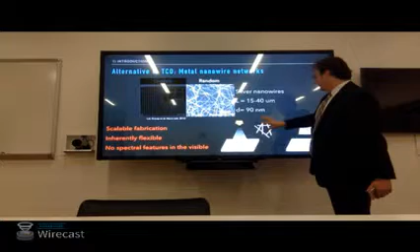So for those reasons, we focus on random nanowire networks, and in contrast to the vapor deposition, we start with nanowires in solution phase, and we can use a whole host of solution phase processing to go from an ink to a layer. Now again, we need an interconnected layer because the silver is doing the conduction here, so we need a percolating layer, it's called, where we have connections in the nanowires allowing long-range conductivity. At this point, you might be wondering, well, I said metal nanowire networks, why do they have to be silver?

I could naively say that silver is the most conductive metal at room temperature, but if you look at the four most conductive metals, there are some nice alternatives, especially when you look at cost. Silver is $250 a pound, aluminum 68 cents a pound. What we're really tracking is abundance in the Earth's crust. There's orders of magnitude more aluminum than silver.

Silver comes back into favor when we consider a couple physical aspects. First, silver and gold are noble metals, more resistant to oxidation than copper and aluminum. Silver will last maybe not as long as gold, but much longer than copper and aluminum. Additionally, copper and gold have a yellowish hue, a visible absorptive resonance in the bulk metal, whereas silver and aluminum are colorless.

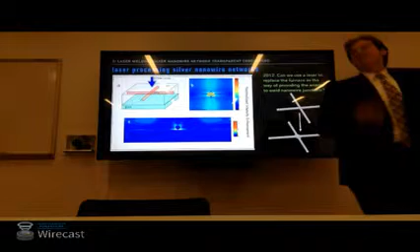Do any of these structures act like antennas? What we see is precisely at the junction between nanowires, we get an intensity enhancement. This wasn't totally a pleasant surprise. We suspected this is what would happen because that junction between nanowires is a highly scattering area. When you have that high scattering, you tend to be able to trade energy into the material, trade a photon for a plasma oscillation in your metal, or plasmon. So we see about a 10-fold increase in intensity.

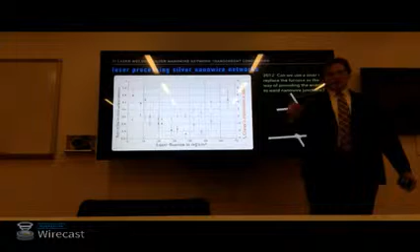So this is the direct measurement, but perhaps we're more interested in the indirect measurement, which would be measuring the sheet resistance before and after this process. So if we make a lot of nanowire networks - and in my 6 years, I don't even want to think about how many nanowire networks I've made - we go and measure sheet resistance before, put it under the laser, and measure that same device, that same sample again. We can report a ratio of final to initial surface resistance as a function of laser fluence.

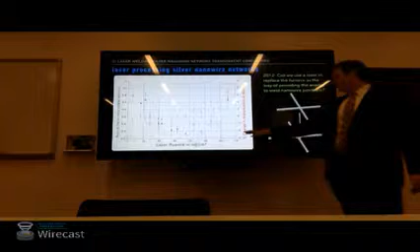That's the energy density again. Now the black dots are that data set, the resistance data set. What we see is we can have up to an 80% enhancement, so have a final resistance that's 20% of the initial resistance, in kind of an optimal processing range of maybe 20 to 50 millijoule per centimeter square, which is actually a relatively low dosage of laser radiation.

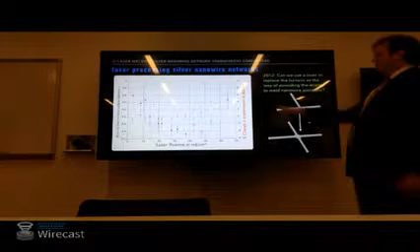For good measure, we can also track the optical transmission of these devices. We don't expect to see a change from the laser processing, and what we see is exactly that. Our zero line for the red data here shows no change to optical transmission within the error bars until we get to very high laser fluences. What we're doing there is removing material with the laser - we're ablating with the laser, and we don't want to do that either. So really this describes, say, 20 to 40 millijoule per centimeter square as the optimal processing.

To get a sense of absolute values for this study, we used very dense nanowire networks, things that are only transmitting about 55 to 70% of light. So it's a very dense coating. However, that leads to high initial surface resistances in the 10 to 30 range, dropping down to 5 to 10 after laser processing. So the squares here are after the processing.

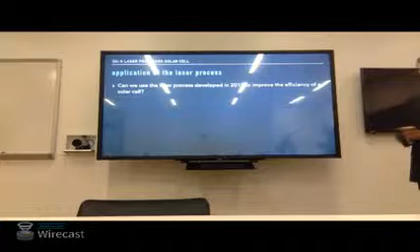So that's the laser process, and we're going to move on now to ask, can we use this laser process in a real device? We'll aim to answer two questions. First, can we improve the performance or efficiency of a real solar cell with this process? And second, because we have a resonant, gentle process, can we perform it on top of a completed device without damaging it? This is the device we'll be using.

It's probably very familiar to Professor Sturm. I worked closely with his lab to do this part of my thesis research. Results published in ACS, Applied Materials and Interfaces. It's a hybrid organic-inorganic heterojunction solar cell.

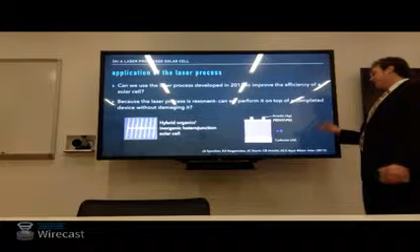Here's our side view of the material system. The heterojunction is N-type silicon with PEDOT:PSS, acting as an electron blocking layer, hole injection layer. When we don't use nanowires, what we would use is a vapor deposited bus bar and finger electrode as our top, an aluminum cathode.

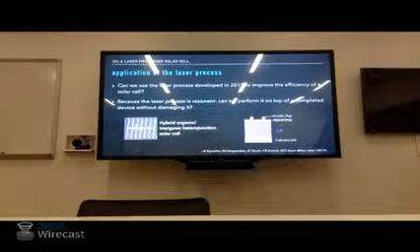And because the top layer next to the transparent electrode is an organic semiconductor, it's sensitive to high temperatures. That's why ITO can't be employed in this scheme. ITO typically requires a high temperature anneal. So we couldn't put this thing in a vacuum chamber and sputter ITO onto it.

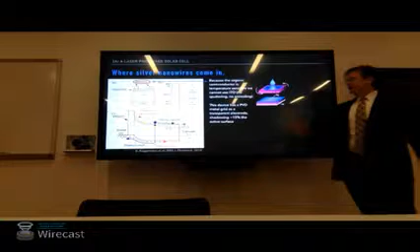So right now they use a bus bar and finger grid. This is kind of the processing scheme. The PEDOT is spun onto the wafer, and then physical vapor deposition for the metal contacts.

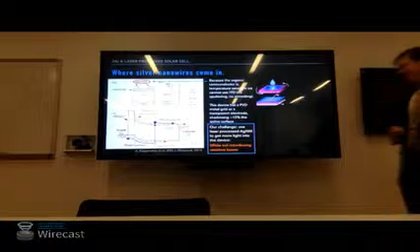A typical bus bar on these will shadow about 15% of your device. That means 15% of your area is thrown away. We're not using that to collect sunlight. Our challenge is to use silver nanowires to get more light into the device, pulling more current out of the device. Our challenge is not introducing resistive losses, resistive losses in plane or across the plane.

We propose this sort of processing scheme where we start again with spin coating the PEDOT:PSS, our organic semiconductor. Then we'll spray coat the silver nanowires. We're going to still have a physical vapor deposition step, mostly for the back electrode, but also have a contact point for testing, so we'll put a contact bar on. Then we'll use our laser. And this is a picture of what a device looks like after it's been made.

Before we make devices, there's some salient pre-testing that needs to be done. The laser processing I discussed just a moment ago deals with nanowires on glass. Now we have nanowires on PEDOT:PSS, a slightly different system.

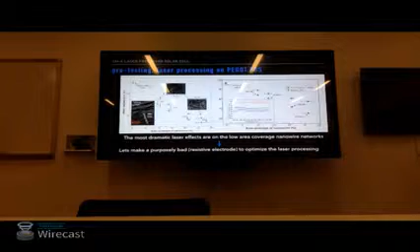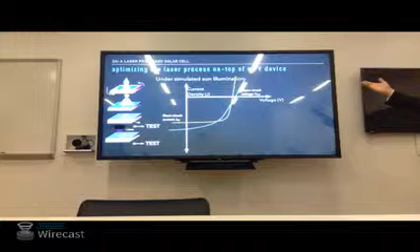We'll be reporting things like short circuit current. So we would say maybe the blue has a better short circuit current, it's pulling out more current. Open circuit voltage, where the yellow has a lower open circuit voltage, but then power conversion efficiency, which is kind of our maximum power we can get out. Again, power is kind of our x times f of x here, if you will. So it's our current times our voltage, we get a power density.

And our fill factor is a geometric factor that relates the open circuit voltage and the short circuit current to the power conversion efficiency. The power conversion efficiency is going to tell us, did we improve the device? The short circuit current, for the most part, is going to tell us, is the electrode more transparent? Are we getting more light?

Light causing current. The open circuit voltage will tell us something about whether we messed up these internal electronics. And the fill factor is going to tell us something about whether we added resistance. And again, this is what we're afraid of, is adding resistance.

So if we look at this purposely bad device that we expect to see large changes, in fact we do. If we track those metrics which I just discussed, we see a clear region where we have great enhancement to our short circuit current and our power conversion efficiency. So we can use this information to prescribe an optimal processing of, say, 15 to 25 millijoules per centimeter squared.

And now we've answered one of the questions that we sought out to answer: can we do our laser process on an otherwise completed solar cell? And yes, right here we have, and we've actually made this already bad device perform much, much better. We're reaching almost 50% enhancement to efficiency. So let's see what happens when we apply it to a more optimized device.

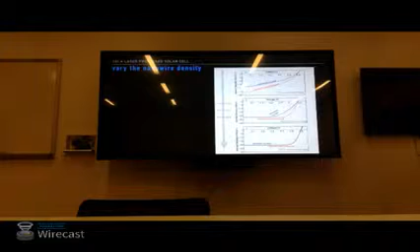Really, the point of the publication, the champion here, is that we can take a device that's pretty good and make it act like an excellent device. Using less nanowires, we can make it act as if it had more nanowires there. You'll also see we get a little more short circuit current, because we're more transparent there. So there's tables of values reported in the thesis. These are values for all of those metrics that we discussed.

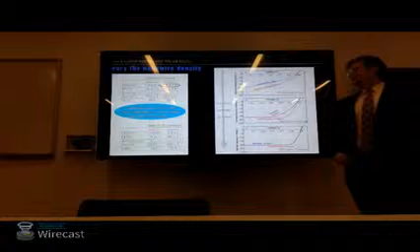Really, the take-home point here is that in the medium coverage batch, we took something with a mean of 7.3% power conversion efficiency and brought it to 9.2. In our best device, we got something like a 26% power conversion efficiency increase in our optimized system. Of course, in the low system, we can report numbers like 50% enhancements, but in a relevant system, a very nice increase. And we can use less nanowires, a nice point to take home as well, and make a device that acts like it has way more.

So summarizing this section, we've answered these 2 questions. We said, can we use the laser process to improve efficiency in a solar cell? Yes. We do right here. We see the same exact device before and after laser processing. Can we do it on an otherwise completed device without damaging it? Yes. You saw that with the low device. You see that here. You see it in all the devices.

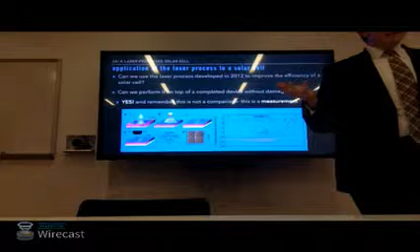Another point to harp on here is that this is not a brand X comparison. I'm not saying that we took a batch of devices that had a laser process and a batch of devices that didn't, and compared them at the end. This is a measurement. We took the device, measured it, then we put it under the laser, and we measured it again.

So let's change lanes a little bit and talk about some of the unique difficulties we're going to encounter moving from the photovoltaic study to the OLED study. So the PV project, as we just discussed, was fruitful. It proved some of the things we were setting out to prove, that we can use this laser process in a fab.

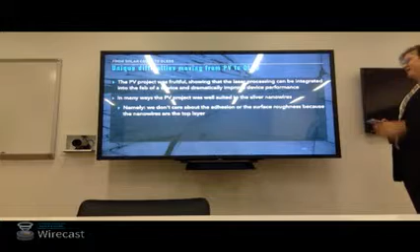But in many ways, it was well suited to using nanowires. If you remember way back to the slide on drawbacks of silver nanowires, we really only had to overcome one here, which was the narrow contact between nanowires. We didn't care about surface roughness. We didn't care about adhesion, and because we had that PVD contact point, we didn't care really about contacting downstream electronics. We kind of heavy-handedly just added a contact.

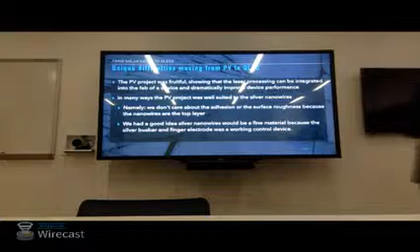So we had a good idea going in also that silver would be a fine material because silver was what was used as the bus bar and finger. So energetics, things like changing our Schottky barrier between the metal and the active layers, weren't really thought about. Didn't have to think about it.

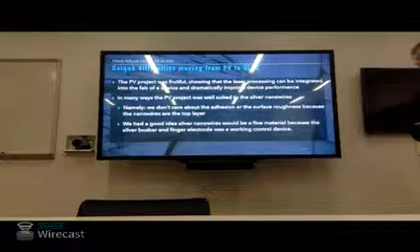Here we have a different beast. This is our organic light emitting diode. And if we see, we have many complex, long-named organic molecules in a highly engineered stack. We have some inorganics thrown in there just for fun. The layers between the anode and cathode here are drawn to scale. But the take-home here is we have many vapor-deposited layers. And our transparent electrode, our anode, is the substrate for all of these vapor-deposited layers, culminating in a PVD aluminum cathode, aluminum with the lithium fluoride injection layer.

In this device, currently, ITO is used as our anode, as our substrate for the deposition of all of these layers. So therefore, in contrast to the PV experiment where we were trying to be better than a bus bar and finger, here really we're taking a swing at the champ. Here we're going after ITO in the name of can we make a flexible device. In the solar cell we wanted to improve performance. Here, if the performance is the same but we have a flexible device, we'll be happy. I'll give it a little bit away. We're going to have a better device at the end.

But the work here is a topic of a paper from this year, Advanced Functional Materials. We were lucky enough to get a journal cover. And Professor Barry Rand's lab was instrumental in getting this work done. It wouldn't have happened without his lab and his students.

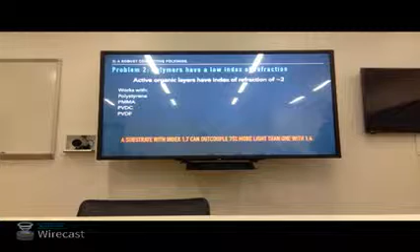This solution, of course, leads to problem 2. Problem 2 is that polymers have a low index of refraction, and the active organic layers in our device have a high index of refraction. This is the list I gave you on the last slide, works with these materials. Well, if we look at the index of refraction for these materials, say we're around 1.5.

What I'm getting at here is that when you create your light in a random dipole in the organic media, you've really restricted the wave vectors which will outcouple. You have this large region, whereas if you emit light with these certain vectors, it will be in a natural waveguide between the organic layers and the inorganic, and the polymer layers, also organic.

Take-home point is that a refractive index of 1.7 can outcouple 75% more light than one with 1.4, and we're holding way too many things constant, so Barry might laugh at that statement, but it is true if we hold all these things constant.

So our solution for problem 2 comes in the form of polyimides. Our famous polyimide, Kapton, our representative from DuPont here is going to be upset I don't have a circle R next to Kapton. It's a registered trademark of DuPont. Has an index of refraction in the visible of 1.7, what we're hoping for. And that's about as good as you can get with plastics.

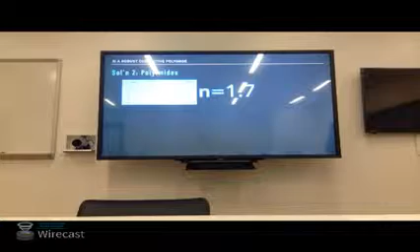And also for free with polyimides, we get great things like chemical stability, thermal stability, and mechanical stability. Sorry, mechanically robust as well. So, this is really a great system to be used as a substrate in flexible electronics. And many people use this as a substrate for flexible circuits.

However, solution 2, of course, leads to problem 3. Problem 3, the polyimides aren't transparent. If you remember that picture that was just on the screen, it has that characteristic amber hue. That's how you know you're using Kapton, or polyimide. So, the solution to problem 3 is to make our own colorless polyimide.

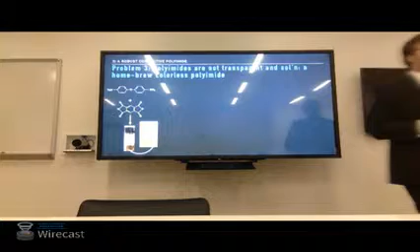So if I give away some trade secrets here, this is how you make Kapton. All polyimides really are a condensation of a dianiline moiety and a dianhydride moiety, the dianiline being the top one here. These things polymerize in a downhill reaction, and then you add heat, you make a polyimide. Again, not very transparent as it looks. It has been suggested in the literature that fluorinated and semi-alicyclic moieties would lead to greater transparency in the visible.

So, you need a 100 nanometer layer. What was that? You need a 100 nanometer layer. Well, maybe I should clarify. The goal really here is to make a substrate and an electrode. So anytime we add more layers, we have to think about the index of refraction, right? So we have to be worried about that total transparency. So really what we'd like to do is just use one material for our substrate and our electrode.

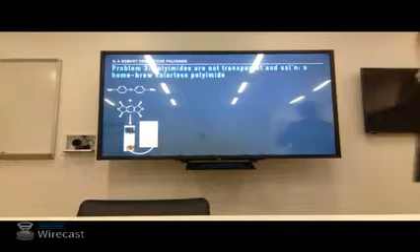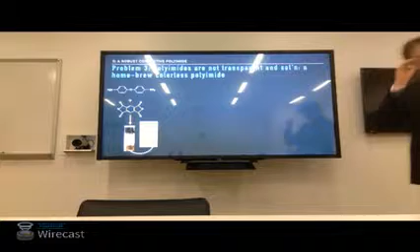So what we end up having is something more in the tens of micron layer, where this becomes unacceptable in transmission. True, if I just wanted to encapsulate the wires and just wanted that one layer, yeah, you could definitely get away with Kapton, because the absorption is going to be negligible in 100 nanometers. However, then the next layer next to the Kapton has to step down or index match and things like that. We just have a nesting doll problem. So we're going to say, let's have our electrode be impregnated right into our substrate.

But very good point. So as I was saying, fluorinated and semi-alicyclic moieties have been suggested to increase our optical transmission. So we settle on this after quite a bit of searching through many moieties. Jake and Carl here were very, very helpful, letting me use their air-free setup to make these things. But this one has a fluorinated dianiline. We see how it looks in solution, and because it's very thin, you can't even tell it's there, but there is a sheet of our transparent polyimide, our colorless polyimide.

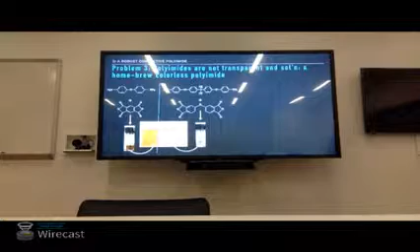This is the proposed chemical structure. We see our imide group, and we can kind of recognize where the dianiline and dianhydride moiety went to. More salient, of course, are the indirect measurements. What we're interested in is index of refraction. We see we're well above 1.6 through the visible. And if we look at the normalized transmission of this versus Kapton, we've moved this elbow of transmission to include more blue wavelengths, giving us the measurement you see with your eyes there.

What's the glass transition temperature? Interestingly, we haven't measured it, but what I've found through the literature for things like this and polyimides in general, they degrade before a glass transition. So, you could think of it as 400C. I mean, they have the excellent thermal stability of being a polyimide, and that goes into it. So, glass transition's kind of a hairy point when you talk about polyimides.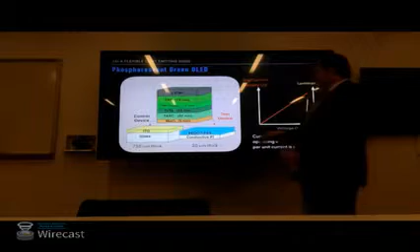So let's move on to our real device. Here are compact representations of those long, ugly organic names I had in the slide where we introduced it. And now we're going to, as I said, challenge the champion transparent conductor, ITO. Our control device is ITO on glass. That device is going to be about 750 microns thick. That's the glass, mostly. If we replace that now with our transparent polyimide, which we can use as both the electrode and the substrate, we have about 20 microns thick.

That's limited by difficulty of processing, as Kyung and before her Taewook know. If we get thinner, it becomes very hard to handle and test these things, but we can certainly do it easily.

And what we'll be looking at this time are similarly JV characteristics. Now we have a log plot, and this is a cartoon model. It's not going to look like this, right? We have many, many different voltage drops and turn-ons and interfaces in here, but if it was just a simple diode, that's what we'd see. And then luminance, which is measuring the light out with a calibrated silicon photodiode.

So this is what we see when we compare our control device with the ITO to our test structure. What we see from the JV characteristics is that the silver nanowires are more resistive. At a given voltage, you get less current through. However, the luminance, which is not a log plot, it's linear, is not that much depressed. So while it's more resistive, this doesn't really show us whether we made a better or worse device.

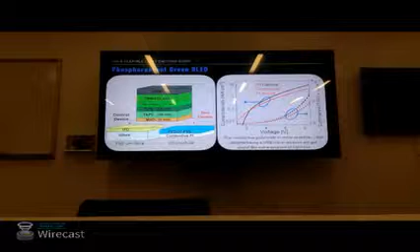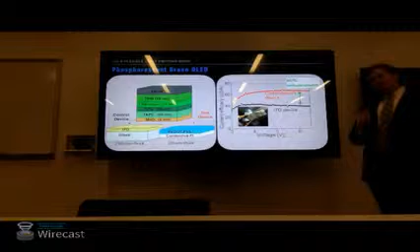And what we see is while the nanowires are more resistive, per unit current, you get way more light out of the nanowire device. In fact, 60% more at 6 volts. With the benefit of being flexible, so inset here is the device being bent in half, which you definitely could not do on the ITO devices.

So let's just take a minute to understand why we get a better device from a more resistive electrode. We have a work function difference now because we're not comparing silver to silver like in the solar cell, but we have ITO to silver. We have more of a barrier to hole injection here. So that's going to lead to that resistance.

However, if we think about charge balance, which is restricting the charge flow to get more of an ideal rate to suppress loss mechanisms that could be there with a higher amount of positive charge carriers in our device, we could actually posit that perhaps the charge balance is better when using this energetic structure rather than ITO. The addition of the PEDOT layer is going to add some series resistance as well.

Another area of enhancement is that this problem we discussed, the outcoupling, and not into a wave-guided mode, certainly holds for our planar interfaces when we use ITO. When we have nanowires here, the reason you can see where the nanowires are is because they're hazy, they're scattering, they're a physical structure there.

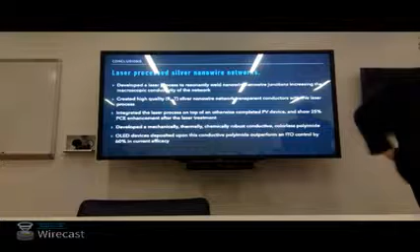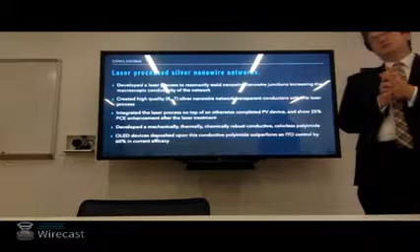So, Josh, do you have an idea why the titanium dioxide is protecting the wire? Yeah, I mean it makes a shell, like a hard shell. That's the best theory - that we have a hard shell, titania, which is kind of maybe acting like a straw around water. If you think of it more technically, maybe it's about altering the local chemical potential, but physically you could probably think of it as a hard shell. I don't think that's a bad analogy.

Have you done any cross-sectional TEM? We have not. There are papers in the literature that we follow closely to make these hard shells, and when we replicate their process, they measured a 2 nanometer shell. So that's what we kind of expect that we have. We have not.

Questions from the audience? If not, John? Do you have a sense for what dominates the resistance here? Is it conduction through the nanowires or an interfacial resistance between nanowires and whatever? Yeah, no, it's certainly both, but it depends on where we're looking, right?

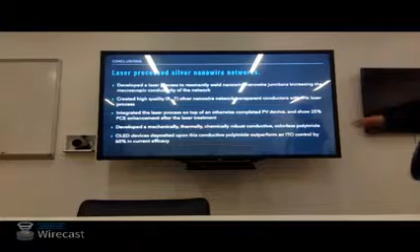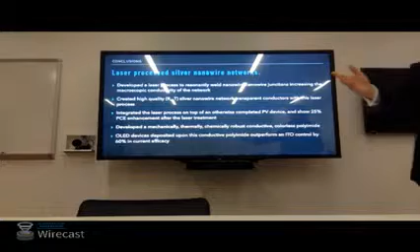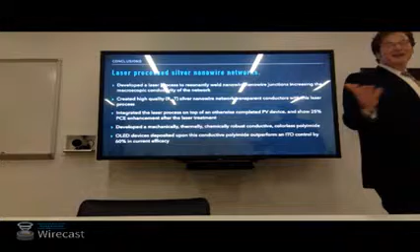If we're trying to quantify just the electrode, we quantify the resistance in the plane, where we have ohmic contact between our nanowires, and we want to take a charge from over there in the device and move it to the downstream electronics. Certainly, if we're trying to use this layer in a system where it's not appropriate, you can build in potential drops or resistances across the plane. Whenever you have a metal contacting a semiconductor or otherwise, you'll have these fields. So it really depends on the electrode we make. I can make you an electrode that's limited by junctions, or I can make you an electrode that's limited by transport through the nanowires. In the thesis, if you want to see, we dive into it a little bit in terms of simulation, and it shows what I just said there - you have a range of useful electrodes where the dominant resistance mechanism can be either.

So there's a lot of companies out there that sell you a silver nanowire ink, like Cambrios and things like that. What do they do? So, go out of business? No. Yeah, I'm sad to announce that Cambrios filed for Chapter 7 bankruptcy just a week ago. And in my thesis, I do praise them as a company that... Right, but what's different? So yeah, Cambrios' focus is...

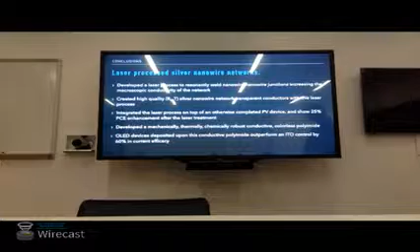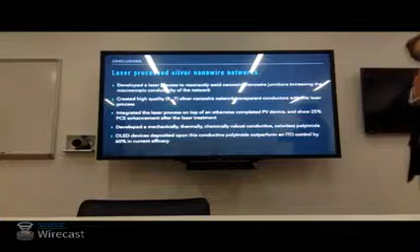What do they get in terms of ohms per square? They have a different chemical trick. Yeah, exactly, precisely. So Cambrios specs 10 ohms per square at about 95% transparency - excellent, beats ITO hands down. Their magic is in their ink. Of course, it's all patented, but this is from talking to a Cambrios representative at a conference: it's dispersive additives and adhesive additives. Dispersive additives give you shelf life on your ink, adhesive additives make it easy to deposit. I guess there's a third thing I should mention also - it's the nanowire geometry. Really, right now, you want the longest, thinnest nanowires. We're not really near a range where the size of the nanowire is going to add to resistance. At some scale, when we shrink the nanowire down, quantum effects will come in and transport effects will come in, increasing resistance, but we're not that close to that. So they use very long, thin nanowires. What that also does is lowers your haze, so you have a very nice looking electrode - you see really the total transmission through.

But in terms of the junctions - yeah, so they have a laser process. That's a key issue. That's their adhesive additives, they say, that makes it so it doesn't need to be post-processed. They recommend a furnace anneal, but not at relevant temperatures. This is the public specs I've seen.

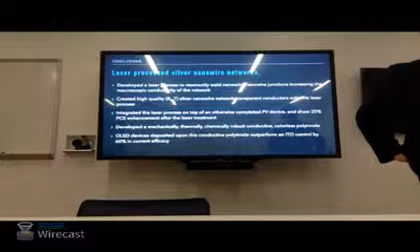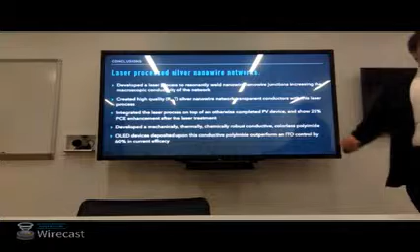I see 10 ohms per square, but I never see the optical transparency associated with that 10 ohms per square. I see that with like the 100 ohms per square, so I really don't know. Yeah, their public specs were 10 ohms per square at about 95% transparency at the same time. We haven't made those here either, and I'll blame it on my nanowire geometry more than anything else, because the adhesive and dispersive additives help with shelf life and deposition, but those are things you get right through trial and error and labor. Certainly the numbers they report are different from the numbers I hit. Or maybe that's the reason they went under, I should say, I won't speculate. But yeah, unfortunately, Cambrios is no more.

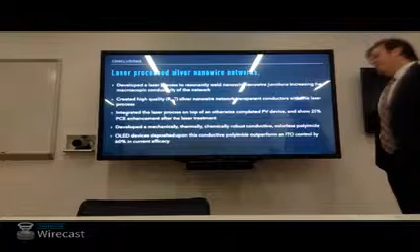One other question, regarding the light extraction in the OLEDs - can you comment on, essentially, you took a glass substrate and replaced it with a plastic substrate. Does that affect that 60% plus or minus? No, that's helping us for sure. We have a thinner interface there, and because we have a higher index in the glass, there's another waveguide between the outside world and the glass.

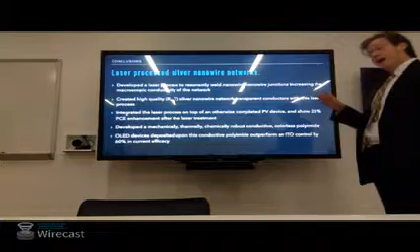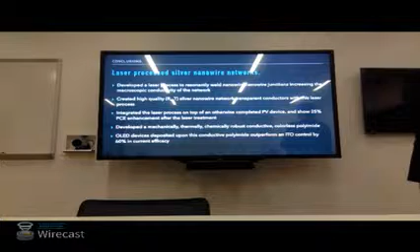So those numbers, were they on glass substrates? Those are ITO, actually, I'm misspeaking, let me back up. The ITO is on glass. And the glass has a lower index of refraction than the polyimide. The polyimide is freestanding, flexible when we measure it, so there's no glass there. Your data was all on the plastic substrate with the high index. That's correct, no glass when we measure, which is part of the reason why it needs to be thick. We're kind of limited on our thickness - we'd like to be a little thinner for transparency, but we're limited on the thickness for what's feasible to handle and test. So 20 microns is what a very skilled postdoc or graduate student can handle.

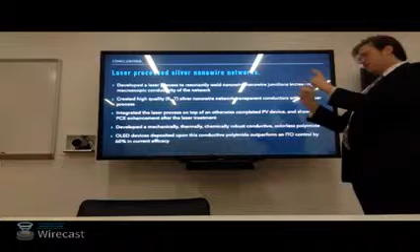I was just going to ask, in terms of potential scale up of something like this, how quickly can you do the laser sintering process? Ooh, that's a great question. Our laser process is limited right now by our linear motion and the rep rate of our laser. There are certainly lasers that can do 100 kilohertz, megahertz, and if you can run that in a stable configuration, rastering along the substrate, you could use our method. Probably what you'd want to do is use a much bigger beam than we use. I didn't harp on this point, but we use a macroscopic laser beam, and because the energy gets channeled to those junctions, we can use a big beam and raster it along the sample. We're not focusing the laser on the junction - some people take that away from the talk, but that's not what we're doing. It's a macroscopic beam causing microscopic changes. So maybe what we could do is have a laser that outputs more energy per pulse, make that beam spot bigger, and increase the speed.

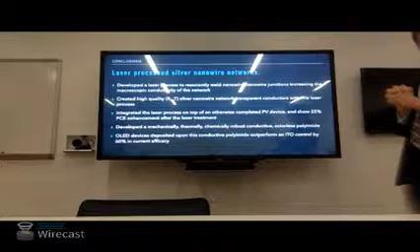Lasers always scare people for a number of reasons in processing, right? Because they sound expensive, it sounds like you need a specialist to operate them, and in some sense, yeah, we can keep that myth going that you need a laser specialist for laser processing or manufacturing. But I can see that there are certainly issues that on a lab scale we have the luxury of not thinking about.

Well, do you have some questions? Yeah, sure. You teased me a bit at the beginning of your presentation by talking about interfacial mechanics. I said that was one of our notes, but go ahead - what insights did you get in terms of the role of interfacial mechanics in some of the systems? I would say the first insight that comes to mind is it's easier and nicer when we can ignore it. So let me explain what I mean.

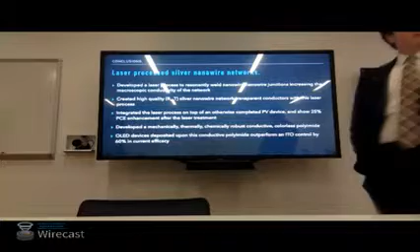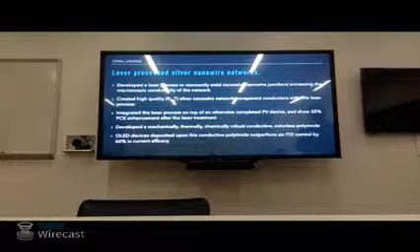So in the solar cell work, because it's our last layer to the outside world, the silver nanowires, I don't have to worry about any sort of mechanical role of that interface. With the OLED work it's a totally different beast. As I mentioned, we need to use polymer encapsulant for the surface roughness. That polymer, with the nanowires in it, has to be robust enough to stand up to deposition and then do our mechanical testing. So we kind of get for free all the beautiful things that come with a polyimide. However, we've tried things like polystyrene, which has a reasonable index of refraction, but it's just too brittle, or it doesn't play nicely to encapsulate all the roughness of the nanowires. So the interfacial mechanics really comes in when we need to peel it off from our glass - we need to know which side the nanowires are going to stay on.

PDMS is great for a number of reasons for flexible electronics. It's optically clear, and there are some methods in the literature to increase the index of refraction, so it might have been a promising candidate. PDMS comes off glass nicely, but it won't hold the nanowires. That's some of where we have to think about interfacial mechanics.

You talked about nanowire cylindrical geometries and adhesion, and I was intrigued by your thinking. Part of this is geometry and adhesion, and part of it is more intrinsic. Could you give us some insights into what the issues were that led you to that?

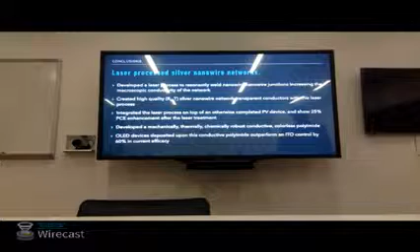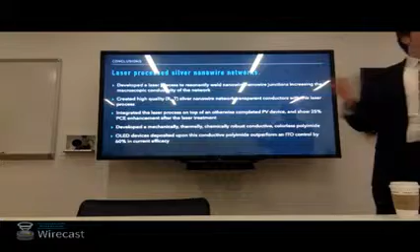What I meant when talking about it is that, in contrast to a planar contact—say a deposited silver film—the contact at a wire on top of a substrate is a line. So we could think of our surface energies as being altered, and that really is what I blame for the adhesion issues of why the nanowires don't adhere to anything. It doesn't really matter what substrate you start with in terms of surface energy, high or low—hydrogen-terminated silicon or oxide-terminated silicon—it doesn't stick nicely on anything.

And that's why these commercial companies have to add adhesives, probably organic molecules, to the inks. Again, I do think there are fruitful lines of research in, say, simulating these things—simulating your chemical environment around a line contact versus a plane. It's not something we look at.

But you've got a dirty surface, in a sense, when you're doing all of this. That's correct, yeah—you really don't know what you're sticking to, from my viewpoint. That would make it a very difficult simulation, yes. Because the real-world analog, as you just pointed out, it's not just our nanowires—there's nanoparticles in there, and there's probably solvent residue, and crud, which is ubiquitous.

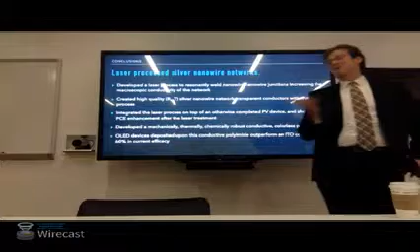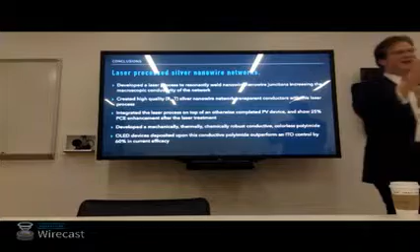Ubiquitous crud as well. So one of the main harping points I put up in the beginning is that we make these electrodes in the lab atmosphere, we laser process them in the lab atmosphere, which sounds wonderful until you introduce ubiquitous crud. That makes me jealous of people who do vapor phase deposition because they get the high purity. But the vapor phase deposition people would look at me and say, do you know how often I have to refine my ingredients? And if something goes wrong, I have no idea what the contaminant was. So there might be a happy medium there, but I get the benefits of working in the laboratory atmosphere that certainly come with detriments like crud.

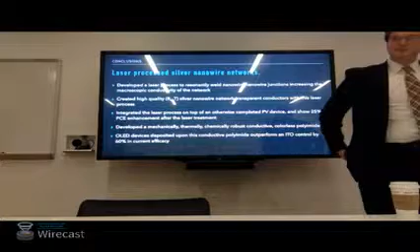Could I ask you a question about an experiment that you vaguely flagged? You talked about making some funny-shaped device that you tested at constant strain rate in tension. Is that right? And you mumbled something about the wires failing first and then the matrix. How does that happen when you've got a random array of fibers?

So the experiment you're referring to: I made a piece of conductive polyimide about 50 microns thick, maybe a little thicker than we'd use for a device, so it has nanowires at one surface. I used a laser to cut it into a dog bone shape just to try to ensure the failure happened somewhere away from our contacts to our Instron.

So you were grabbing it in with the tension at opposite ends, and we used a constant strain rate, something like 0.33% per second—not too fast, not too slow. Room temperature, out in the uncontrolled atmosphere. And actually, to be perfectly honest, probably our alignment wasn't great either—it's not impossible that we weren't pulling it straight up and down.

So that was more to show that these networks, or this material that we created, are not very stretchable.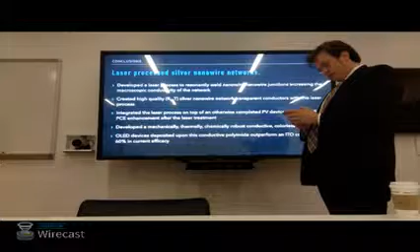So yeah, it was a bit of a throwaway. Why did you say the fibers fail? So first, what were you measuring, a resistivity while you were doing this? That's right. Actually, a lot of these nanostructures are not very ductile. So fundamentally, if you stretch them, they will tend to fail before.

Yeah, but you have a random array, at least in 2 dimensions. Here we go, fiber orientation. Yes, we have a random array. So each random fiber is small compared to the length of the section you were testing? That's correct. So this is kind of our dog bone structure here. What I observed, I only ran about 5 of these, so certainly a more controlled experiment to characterize failure would be needed.

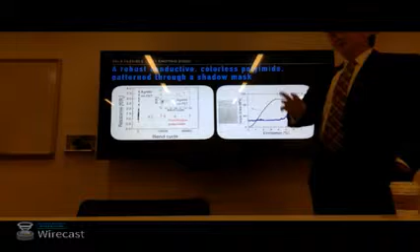However, what I observed somewhat repeatedly is that our resistance shoots up before our device breaks at about 6% elongation. But you've got a yield process, presumably. That's correct. So I guess you could say yes, it's failed. It is failed, but not fractured. So after the yield, the network at one of the surfaces starts to become disconnected. And we're measuring resistance from here to here, while these 2 points are being held by our Instron machine.

So I think it's perfectly suitable to say, to your point, if I wanted to use this in something that needs tolerance for being stretched, I want to be only in the elastic region, and you do maintain your resistance over that use period. What I was saying, maybe too glibly, was before fracture, the nanowires fail. But because you're in this stretchy matrix, because you're random, in the elastic region your resistance is rock solid.

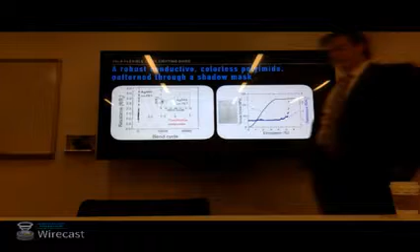We did a test with one of these. It's not reported here, it's in the thesis, where I took it up to 2.5% elongation for 50 cycles. Saw no change in conductivity. By that you mean you did 50 cycles, 0 to some strain level and back to 0? And there was no hysteresis in your curve? In the curve, no. There's a bit here at the start, but I might blame that on the machine. Loading and unloading, right up in an elastic regime, to my accuracy of measure. Exactly.

So if you want to make something flexible, are the strains really that high? You've basically done a tensile test where you're applying direct axial loading. But when you bend these structures, are the strains that high? Well, because they're so thin, they don't have to be. A lot of this is accommodated by it being very thin. If we had a thick chunk of polyimide, it would probably fracture. So for bending, your strains would be much less because of your geometry.

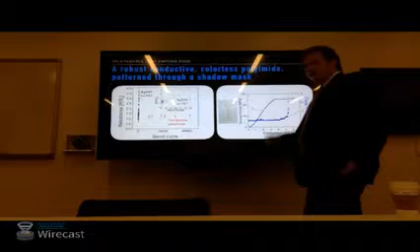He's also got an asymmetric sample, so his neutral axis is ill-defined. Still, the strains would be low for bending, because they scale with the distance from the neutral axis. The implication of what he said was that the fibers were on the outside, so wherever the neutral axis is, they're either in tension or in compression. And to your point, when we do this, we're actually bending to an S shape, so we have that surface in tension and compression. S shape to 1 millimeter bend radius.

Aaron, the end where you were talking about the performance of the OLED. Yeah, let me take the mechanics plots off the screen. Whew, I was waiting for that. Thanks, Aaron.

At the very end, you were making some hypotheses about this 60% enhancement that comes despite an increase in resistance, if I understand correctly. It seemed there were a couple of factors at play. What do you do experimentally to tease out which one? Excellent question. The answer is it's difficult.

Probably the best way would be to couple some simulation work to look at that optical interface through electromagnetic simulators, and also make direct energy measurements with something like UPS, ultraviolet photoelectron spectroscopy. That'll tell us about our interfacial energies, whether our energy levels are really where we think they are, because we have so many interacting layers. Things can pin electronics.

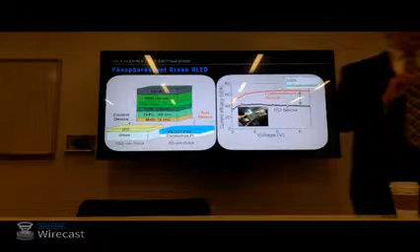I mean, one of the nice things about our nanowires, which are pentagonally twinned, I talk about it a little bit in there. I didn't put the material science in the display, but one of the nice things about our pentagonal cross-section nanowires is that they're generally single crystal, which people wave their hands and say you get nicer transport through. So if I could have a single crystal, maybe with a slight aspect ratio, being flat, so I could have nicer adhesion to a surface, maybe rectangular, so more contact.

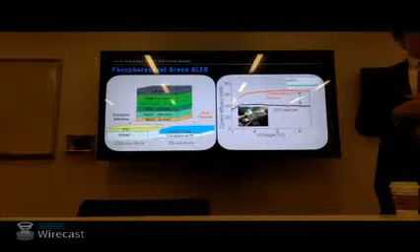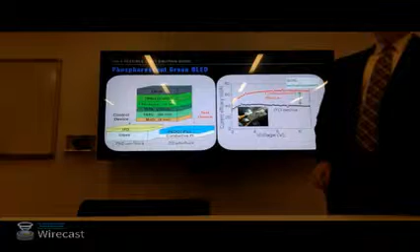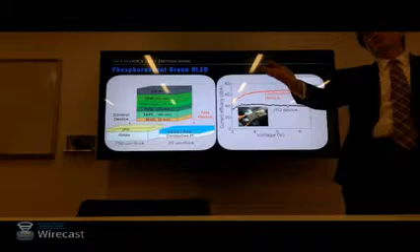You're talking about the sheet resistance when you're saying long, thin. So yes. But isn't surface scattering in your fiber very important for that, for the electron? Yes, and so if we have, say, single crystal and typical transport, I mean, it's mesoscopic for sure, but if we could think of it as, say... Well, it's an electron mean free path issue, isn't it? That's correct. So what's causing that? Is it defects or is it the surface? In our nanowires, we have to blame it mostly on the surface. So in my made-up nanowire, it's also single crystal, so you would have more surface if I use a rectangle than a cylinder. That's correct. It's an interesting exercise.

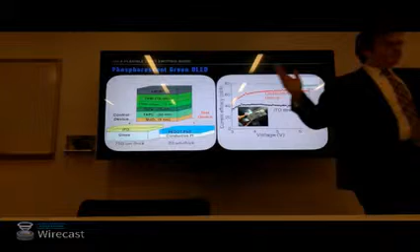I will somewhat reject the premise, it's an interesting one, but I wouldn't change that they're randomly distributed, because randomly distributed nanowires can kind of wash out diffraction and moire interference. So you have a nice flat spectrum through the visible, whether you look at, say, absorbance. The reason we have no features is because we have a random arrangement.

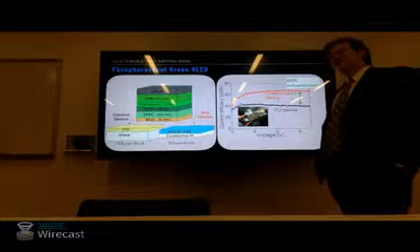So why didn't you use graphene? So graphene, I was looking at this after we chatted. If I want a 1 inch by 1 inch CVD graphene, where you could be kind of confident you have one layer, it'll cost you $500. So really, we can't make large uniform graphene in a reasonable process yet. So I wouldn't be surprised if graphene is the champion one day.

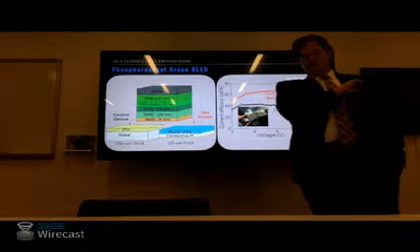But as soon as you have 2 layers instead of 1 of graphene, your optical properties, your optical transmission, quickly go away. And as soon as you have grain boundaries in your sheet of graphene, your electrical properties quickly go away. So the CVD graphene that you buy on a wafer, they spec 500 to 1,000 ohms per square. CVD comes with some concentration of grain boundaries that make it very difficult to use as a transparent conductor. One day. The future's close.